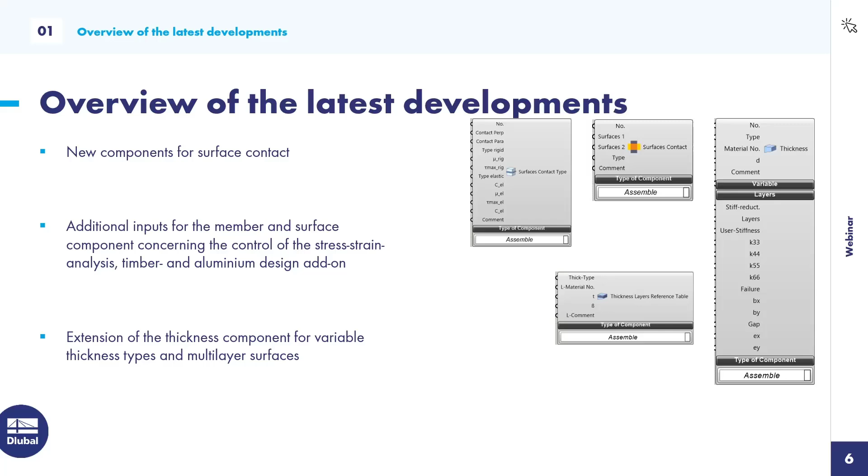I think the key feature is here the template functionality that we implemented a while ago into our export component. And the last feature that I will show here in the PowerPoint presentation is the extension of the thickness component for variable thickness types and multi-layer surfaces. This obviously will be a topic of today's live demonstration. The last feature that I would like to show here is actually related to the installation process of Rhino. So let me show you Rhino 8 in a second here.

In the past, the plugin could be installed via a specific folder in the RFEM 6 program folder. We changed it. Everyone can install the plugin now via the Rhino package manager. So if you go into Rhino and you call up the package manager, you can search for Dlubal here, and you can see the Dlubal plugin, and here you have various versions of the plugin. An important information for you: in case you're using Rhino 7, you should use the versions with the number 7 in the front. And in case of Rhino 8, use the versions with the version number starting with the 8. For today's webinar, I'm using an internal version. Anyway, you can do the exact same algorithm in the current customer version of the plugin.

All right, then let's switch to the second chapter of today's webinar, the live demonstration. To give you a feeling for what I'm doing in Grasshopper, I would like to show you the final structure first in RFEM, and then hop right into Rhino 8. So that's the CLT structure that I would like to model. It should represent a bus or train station, where you can wait for your train or for the bus, and you're protected against rain and wind and so on.

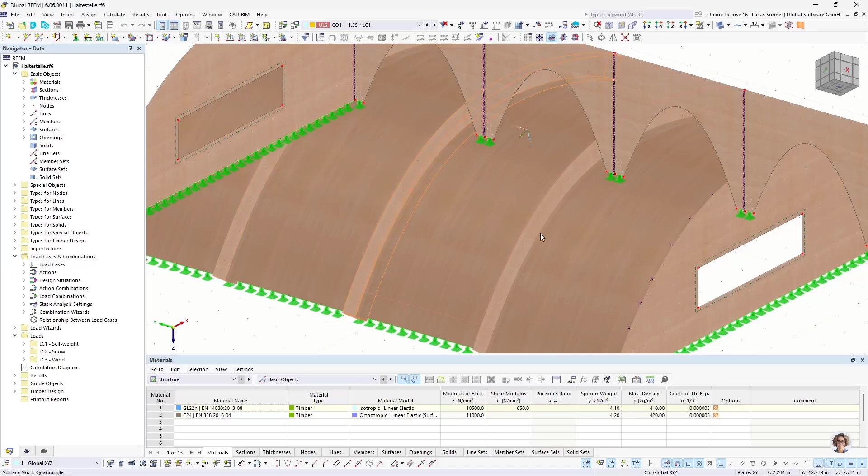So you have here these CLT wall, slab and wall elements, and inside some additional timber beams that support the roof, and on the front some openings to go to the train, and on the side some windows to see if the train or the bus is coming. Obviously a made up example, but it serves the purpose of today's webinar.

I would like to show you the workflow and some new components. What do we have here as well? We have some line supports on the bottom, and additionally some line hinges, because CLT panels are usually connected hinged. So we need the line hinges as a tool here to have the proper force transfer. That's also the most tricky part of this whole algorithm. I will explain it, of course, afterwards.

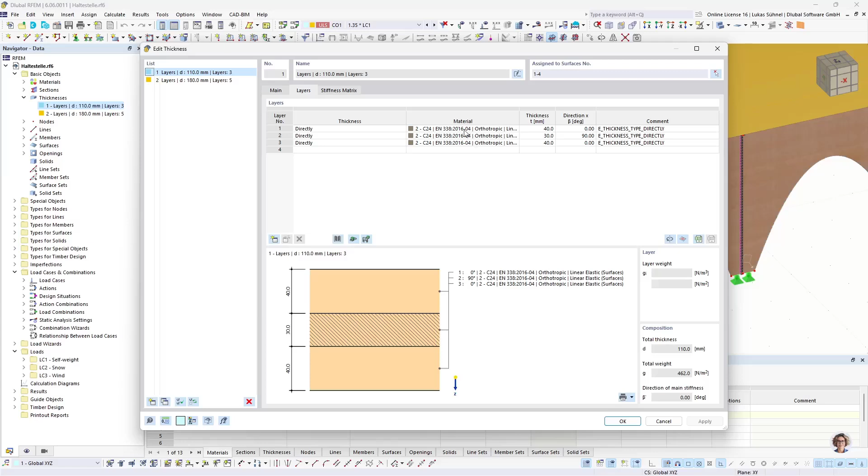And apart from that, we have, of course, our new layer thickness types in here, in which we then define the layers individually. All right. That should be it as a rough introduction of the structure. Let's go right into Rhino 8, and here I will put Rhino to the left and Grasshopper to the right in a second.

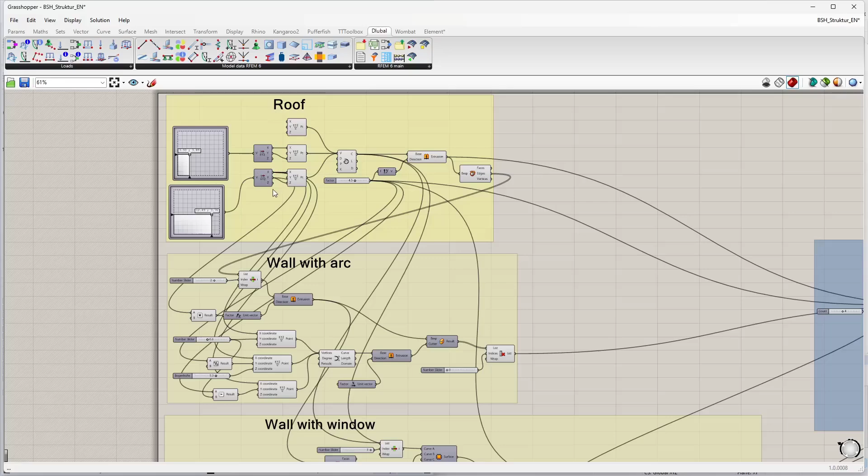One more little overview for you, what I will do in the next hour or so. I will create this algorithm here. We start with the Grasshopper algorithm, where I model the roof of the structure, then the walls with the arc, the wall with the window, then some data management, copying and so on, collecting my objects, the surfaces, the lines that I will use again afterwards, and then the connection to RFEM via our Dlubal plugin.

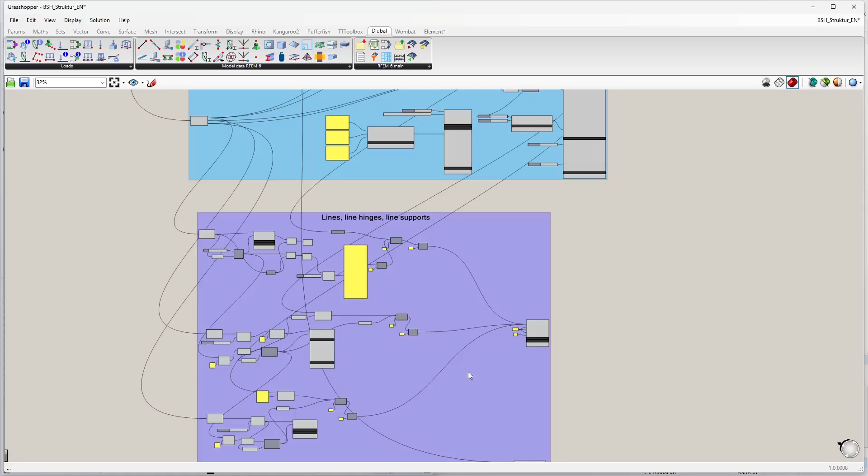I will create materials, sections and members, thicknesses and surfaces, and last but not least, lines, line hinges and line supports. All of those components then will be connected with our export component, and we get the structure in RFEM 6. All right, so let's create a new file in Grasshopper, move it to the right hand side of the screen and start with the modeling.

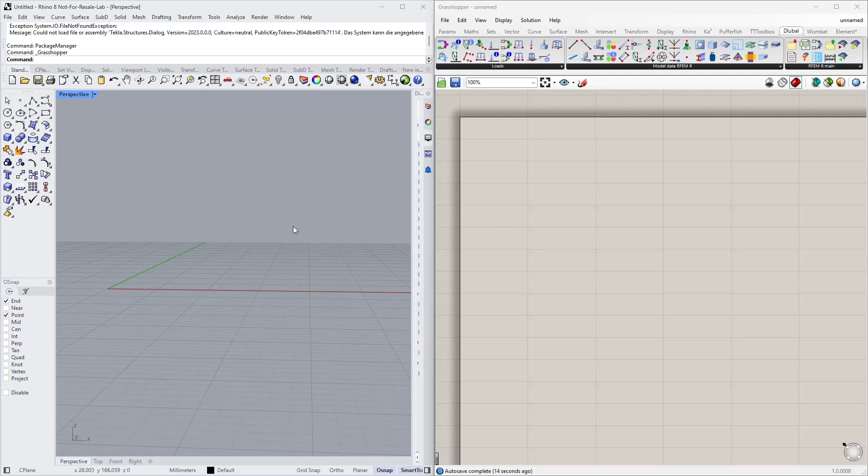As I said, I would like to begin with the Grasshopper algorithm. So I need a plan how to model that, and I will start with the roof. The roof was curved, and therefore I need some kind of a curve with the interpolate component. The interpolate component requires the nodes. You can see it basically on this little icon here. You need to define the nodes and then it will interpolate a curve.

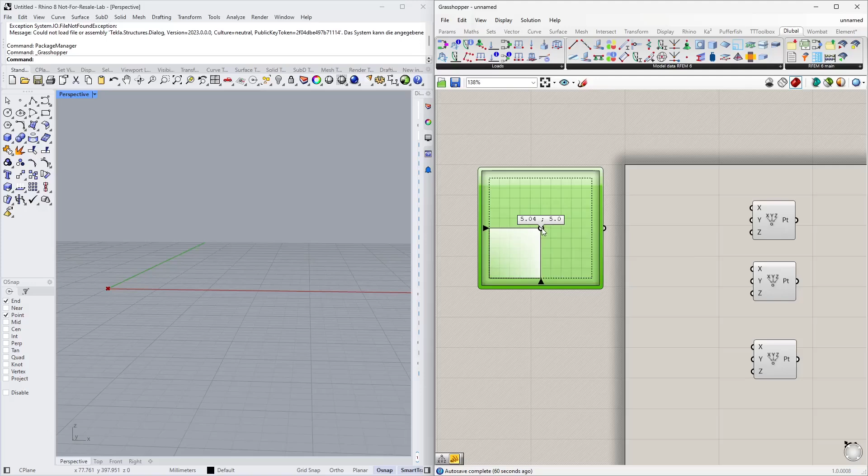And therefore I need 3 nodes and I use the construct point component for that. The coordinates of those nodes should be defined with MD sliders. This MD slider's properties will be changed a bit, so from 0 to 10. So with this slider I can define basically a node, a coordinate x, y, z. Z, however, is always 0 here, so I change x and y coordinates by moving this little dot.

Now my curve will be in the xz plane, therefore I need to deconstruct the node that I get here. So I deconstruct the node and I build it again, just using different coordinates. So x should remain as the x coordinate. The y coordinate, which I can modify here, should be the z coordinate. Actually that's already the second node, my bad. The first node should be at 0, 0, 0. So that's the first node here in the center of origin.

The second node, which I can modify now with the MD slider. And the third node should also be modified via an MD slider. So same logic. Y should be set. And now I can define this arc. Let's pick some proper coordinates. And now I can connect it to my interpolate component and I have a curve. So that could be the shape of my structure, for example.

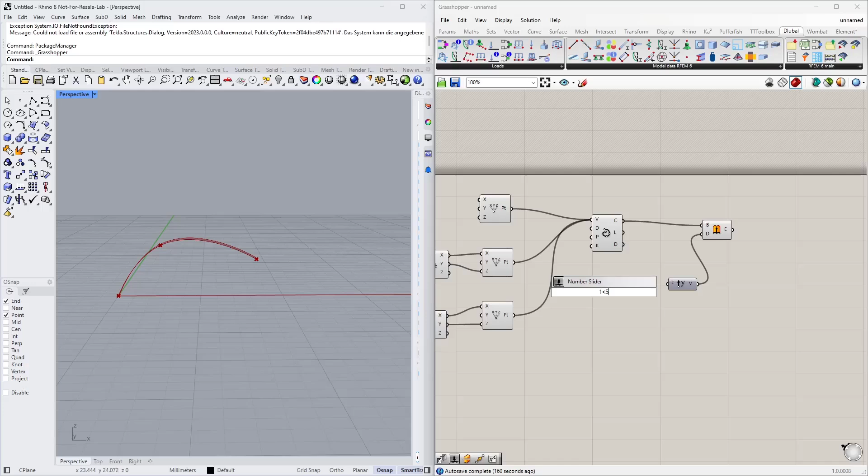All right. Now I need a surface, so I can simply extrude this curve into the y direction. And I want to define a distance via a slider, so I define a slider from 1 to 5, for example, using the metric units here in my head. So now I can extrude this line into a surface. All right, that's basically it.

That's already the first part of my little algorithm, and I group it, and for a better understanding I can give it a little name. So that's my roof surface, for example. Okay. All right, so second part is the wall on the front. Let me show it again in RFEM so you can follow easier.

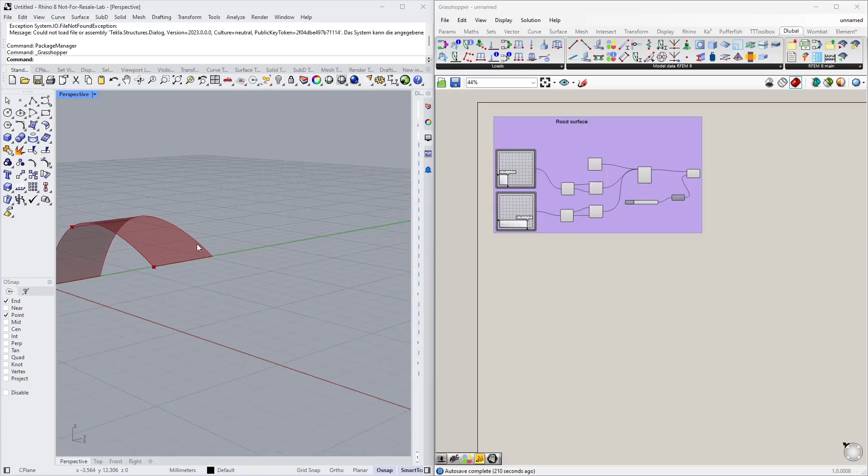I want to create this wall now with the arc-like opening. So what I need for that is this line here, and I want to extrude it into the Z direction. To get access to this line, I will deconstruct that surface. Therefore I have here the deconstruct brep command. I link it to my surface.

Now I have here the faces, the edges, and the definition nodes, and I need just one of these edges, so I take a list item component, connect it here, then define the little slider to select the line from that list. Let's see which it is. Index 0 is the one on the end, on the bottom. Index 1 is this arc. Index 2 is the line that I need.

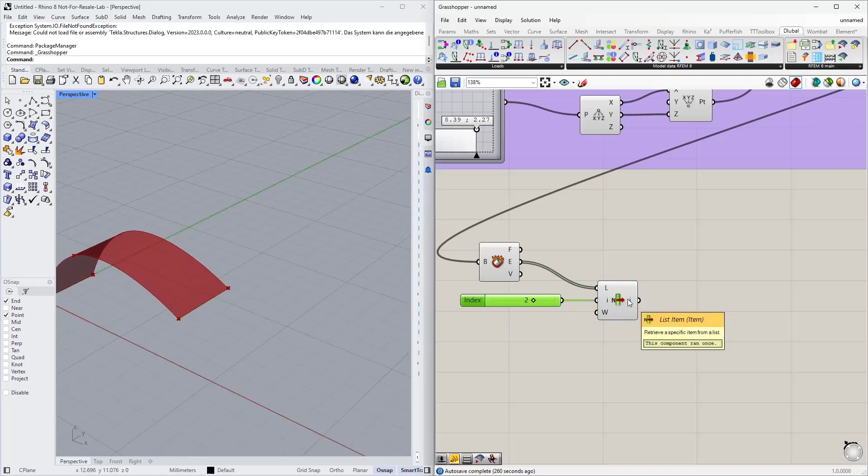Alright, so I have this single line in this component now, and now I simply extrude it again in the Z direction. And we can already see it is the wrong direction. So I probably need to multiply it by -1, and the coordinate itself comes from my arc or my curve that I defined in the beginning. It's the Z component or Z coordinate of that node. So obviously the Y coordinate here, and multiplied by -1.

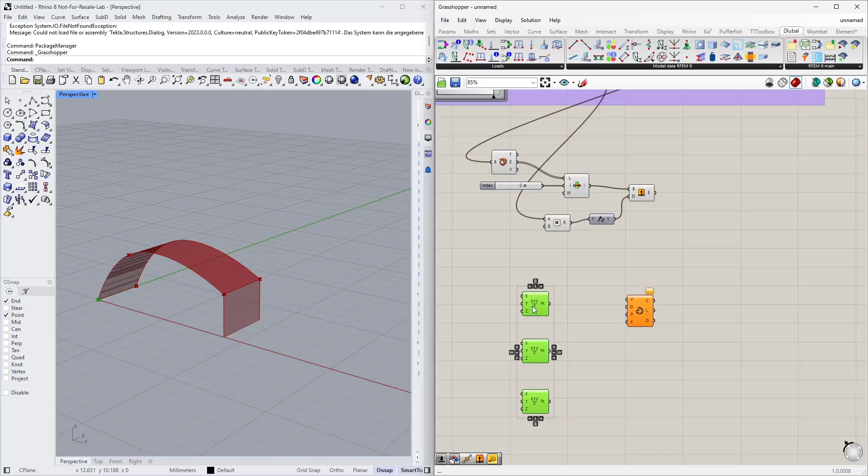All right. So where should the first node be? Basically, all of the nodes have the same X location as the wall or the end point of my curve. So the X coordinate is always the coordinate from the last point of my curve. And now I need to modify the Y and the Z coordinates. The first node should only move slightly in Y direction, so I make a small number slider, and I want to have floating points, so I change the type of it and connect it to the Y coordinate. So this distance that I define here via this node is basically the length of my wall support on the bottom.

The second point should be in the center. Center basically means the dimension of the extrusion divided by 2. So divide by 2. Link it to the length of the extrusion, and that's my Y coordinate for the center point. And I need a number slider to modify the Z coordinate. All right. Maybe also with floating points, so like that.

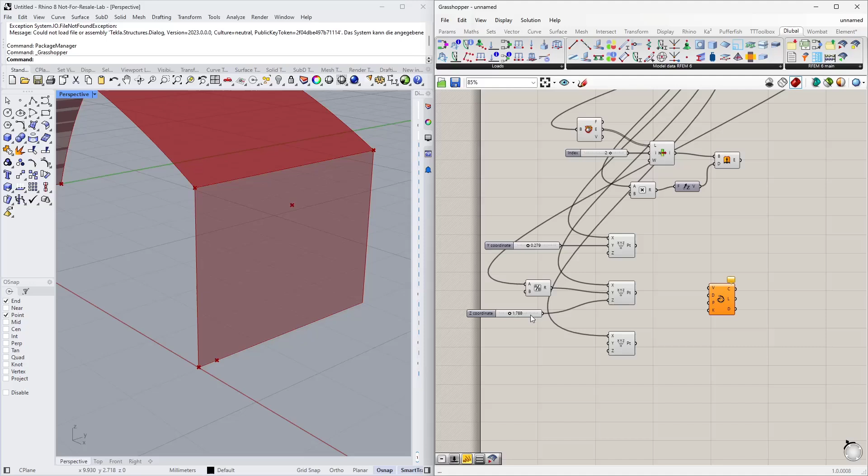And the last point is again on Z on the bottom of the surface, and it should have the same distance as the first point. So again, I just do a little subtraction. I subtract my required support length from the extrusion length. That's the Y coordinate. So whenever I change the length of the support, it will change on both sides. All right, these are my 3 definition nodes for my curve. And now we can see it.

The next step is, let's say, like a trim command. I would like to cut out this part of the arc from the rest of the surface. I can do that with the component split brep. The base surface is this one, and the so-called cutting shape is a surface. So I need to extrude my arc again into X direction to get a surface for it. So actually extrude first, extrude in X direction. Yeah, just any surface, and now I can use it to cut the original shape.

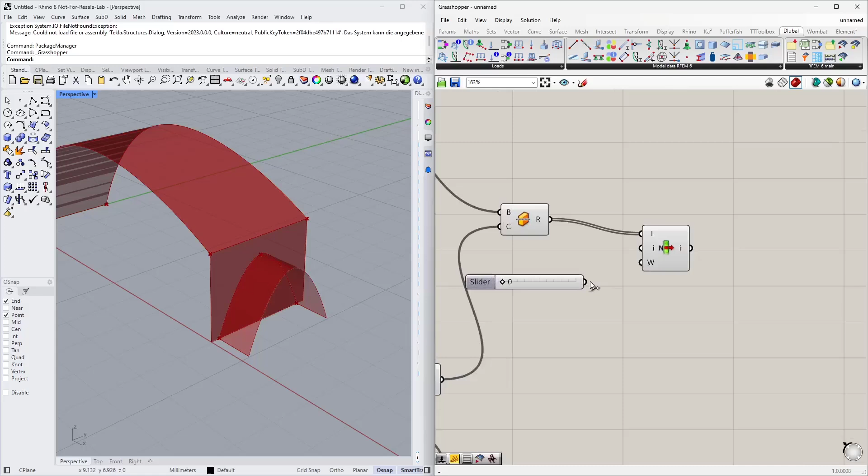I get here 2 surfaces now. I just need one of them. So again, a list command to pick one of those indexes, and a little slider to select the right one. So index 0 is, let's say, the surface of the opening. Index 1 is the remaining surface, and this one I want to keep. So let me hide some of the other objects to see the result of my little algorithm. That's the remaining surface. That's the one I need for later.

So I already finished the second part here. Again, I could give it a name. Arc, surface, whatever. Just so that I can easily understand what I'm doing even a couple of weeks later. And now the last surface is the surface in the front. To create that, I would like to use the edge surface component.

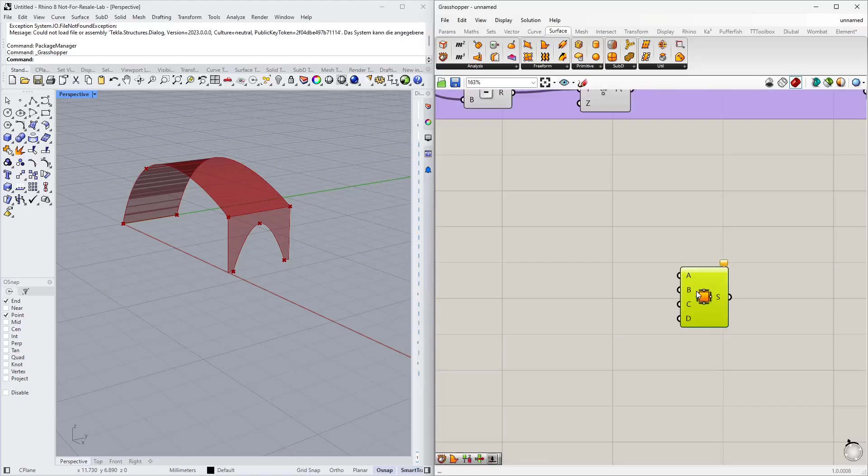I only have to define the boundary lines. One of my boundary lines is of course my curve that I defined in the beginning, like from the roof. And the second curve for my surface should be this side line of my front surface. So again, I deconstruct this surface here in the front. And I try to select this line here on the side, again with the list item component.

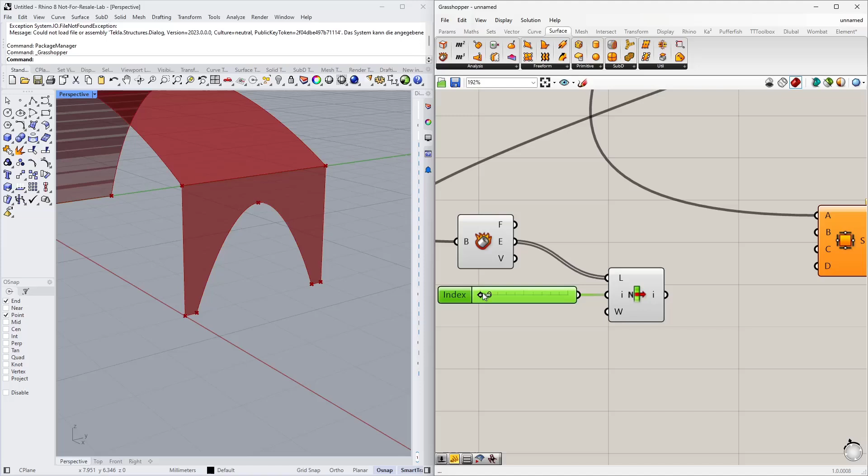Let's connect a slider to it, and now let's go through these lines to see which one it is. Oh, the edge lines, of course, obviously - that's the other side. Now I have it already indexed number 2. Yeah, that's the line I need. So I connect it again to that surface component, and I already get the final shape.

So far so good. Now I need to cut out a rectangular hole in here. Same logic as before: I will create the rectangle in this case by 2 points, A and B. Then I extrude the rectangle and cut it again from the original surface.

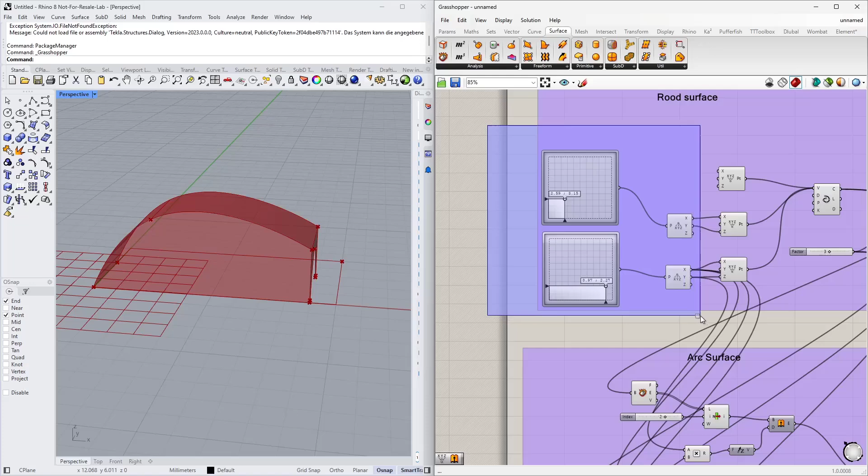These 2 definition nodes of the rectangle can or shall be defined again via a slider. So I just copy some of those things here, copy, paste, and I will reuse it down here. Yeah, actually that's already okay - I can connect them as definition nodes for my rectangle.

The rectangle can be placed in any plane, as you can imagine. So I can define the plane by setting it here graphically, or in the Rhino lock area on top. I would like to have the rectangle in this ZX plane. Okay, yeah, that's now in the right plane.

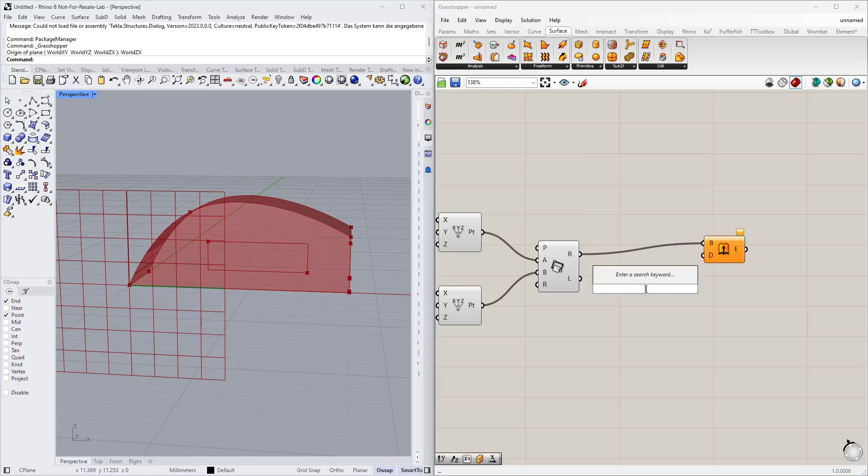Let's set some proper coordinates for the rectangle. So maybe that's the size of the window that I would like to have, and now I have my rectangle here. Again, I extrude it into the Y direction.

Now I can use the split command again, split brep, to cut out a hole. Let me copy the list item that I defined on top here. Again, I want to keep only one of those surfaces, and this time I think it is index 0. Exactly, yeah. So let's hide some stuff to see the result of our work here - that's the remaining surface with the opening, the rectangle opening. All right, that's already the basic geometry that I need.

And now I can copy this stuff - sidewall, let's say. Okay, now let's copy the surfaces. That can be done with the move command or move component. And which objects do I want to copy? Of course, my roof surface and my front surfaces or front surface. And the default is set, as you can see.

Yeah, it's copying it in the vertical direction, which is not correct. I want to copy them in the Y direction. And I want to copy them multiple times. For copying something multiple times, you can combine a move command with the series component.

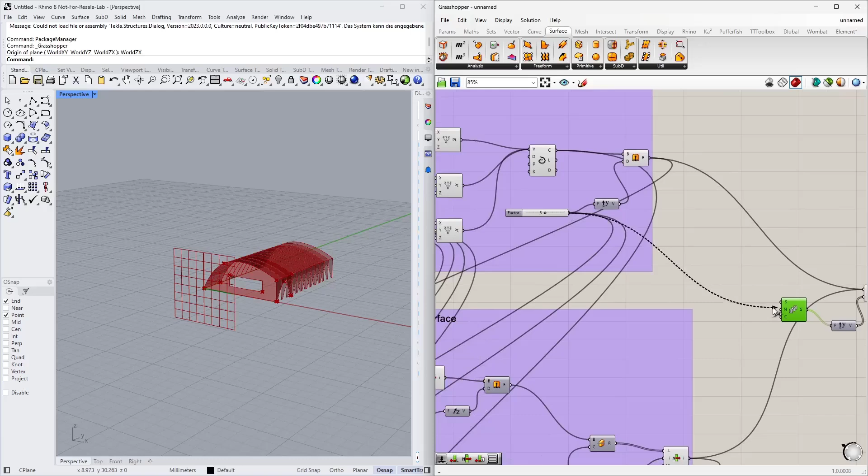And as a step, I would like to use the extrusion length, of course, to have them placed next to each other. Now I can control the amount of copies with a small slider - let's say 4 copies. All right.

That's a big part of the structure. Now I only have to copy the front surface to the end. So I use another move command for that, and I copy this surface. Of course, not multiple times - I only want to have it one time.

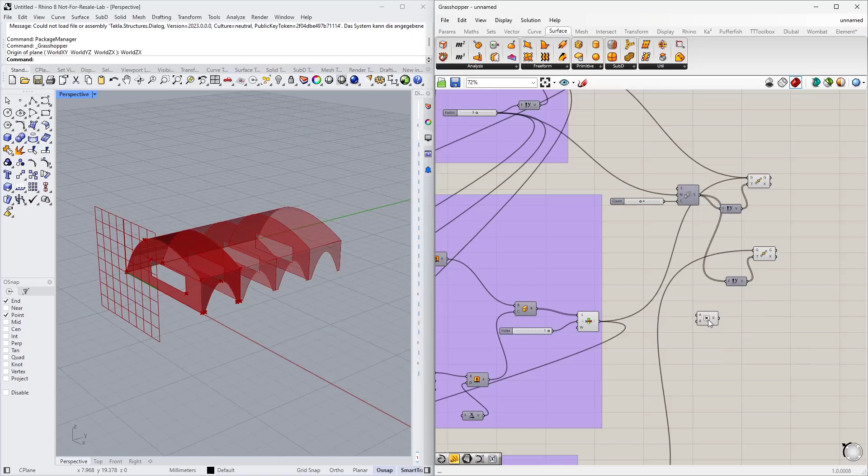And then the distance for this is actually a little multiplication - we simply multiply the extrusion length with the amount of copies. And that's the length that we need to copy it from the front to the end. Okay, so far so good.

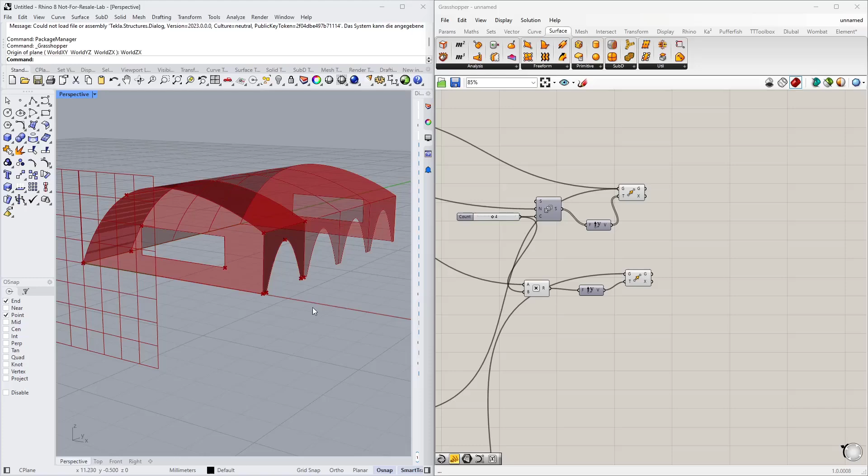The geometry is done. What I need now is a little bit of data management, because afterwards, thinking of the RFEM 6 connection, I need a collection of lines. I need the collection of lines on the bottom, all of those down here, because on those lines I would like to assign a line support, and I can use these lines in my line support component to export it to RFEM 6 afterwards. Additionally, I need these 3 internal curves, because I want to assign a member or a cross section to them, and maybe also a collection of all of the surfaces that I have.

So maybe let's start with the curves for the beams. How do I get those? They are basically inside that component. This component contains all the surfaces from the roof and from the front. Now, if we take a look at the data in that component...

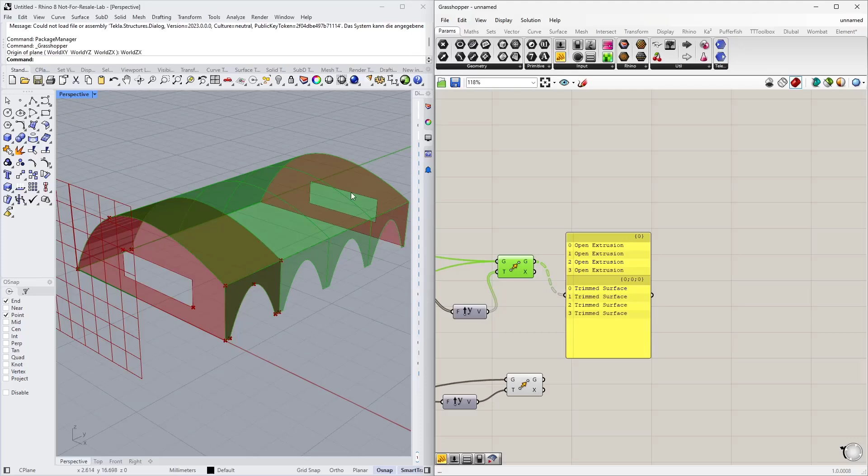We see that it has 2 groups. Let's call it 1, 4 open extrusions - these are my roof surfaces, and in the second group, my wall surfaces. So what I can do here is I can explode this tree and get each branch of my tree, or get access to each of these branches - first branch, second branch. The first branch, as I said, contains the surfaces of the roof, and I can deconstruct them again.

So you can see it here again. Those are the surfaces, and of course the boundary lines and so on. And now I would like to select only these internal curves, basically just one of those lines per surface.

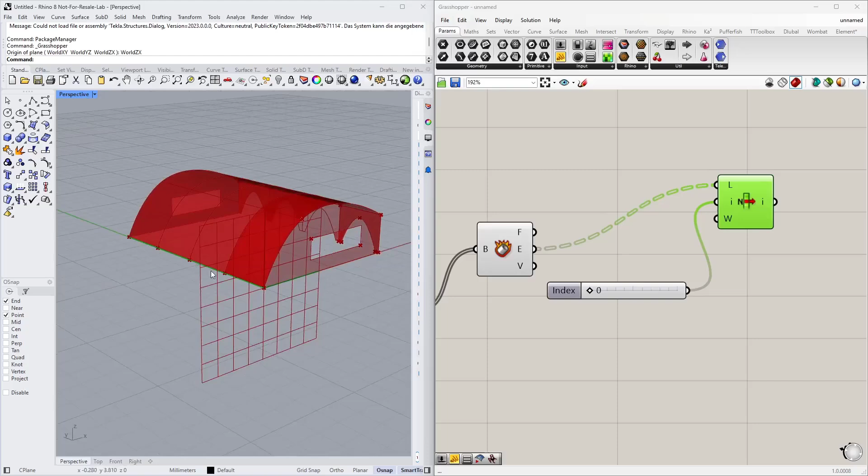So I need again a list item component from my edges, and let's see which of the index numbers it will be. The index 0 is the lines on the bottom. I need that maybe later for my line supports. I'm looking for the roof curves, and index number 1 is the one that I need.

It contains these curves. However, it contains 4 and not just the 3 that I need. So what I can do now is get rid of the last index from that list. Currently it is not a list, it is a tree. On each branch of the tree I have 1 curve, but I can make a list out of it by flattening this tree, and now I remove the last index.

It can be done by using the cull index component, and the last index can be defined by a panel with the -1 value, and the remaining lines are the ones that I need for my beams.

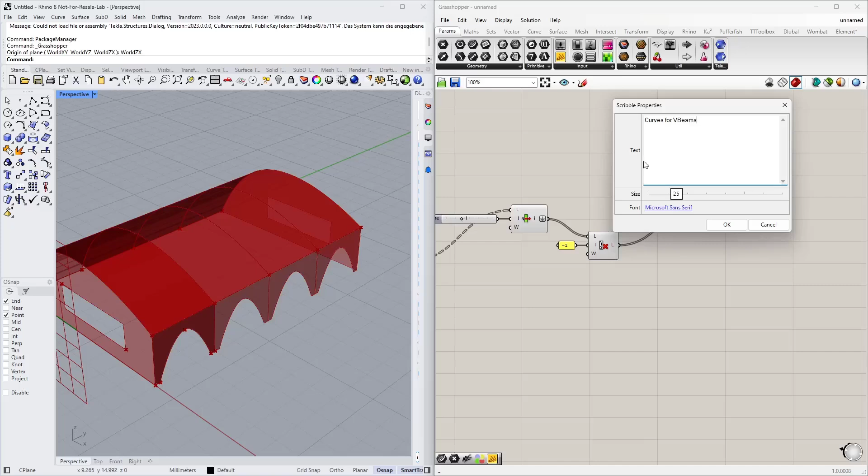So let me collect that in an additional component so I can easily reuse it afterwards. Maybe again a little comment here: curves for beams.

Now, second part should be the curves for my line supports. We already saw it in that component. Here I can select the curves on the bottom of those roof surfaces. It was index 0, so that's already one part for my line supports. And the other bottom lines are included in the wall surfaces.

So basically I can copy this part, connect it to my surfaces here in the front, and now look for the index number of those walls. Which of those lines are the ones on the bottom? So I scroll through that. Index number 1, as we can see.

And now my slider is not long enough, but I can tell you that it's index number 5. So I need index 1 and index 5. So I create a little list, 1, 5, and connect it to that component. This list item gives me now the lines from my, or 2 lines, index 1 and index 5. And we can hopefully see it, that it's the line on the bottom, on the right and on the left side.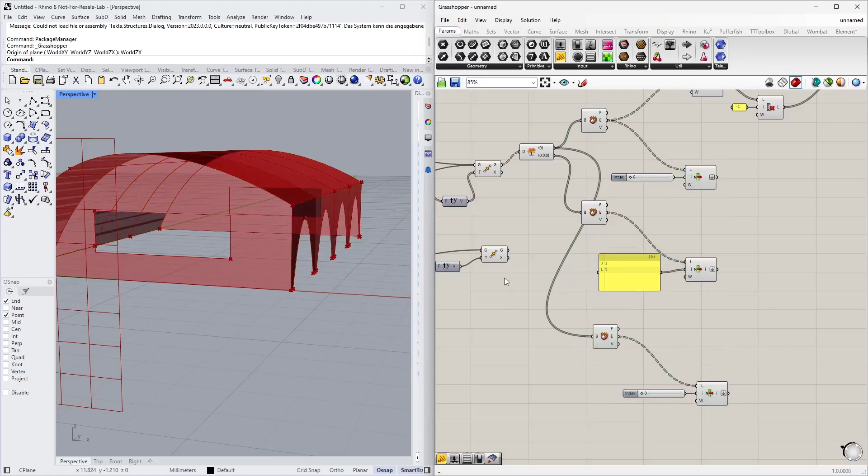Now I need the bottom line from the side surfaces. Same procedure, I copy again this part. I connect it to my, well, actually I need 2 surfaces: the front surface, which is down here, and also the copied surface from the back.

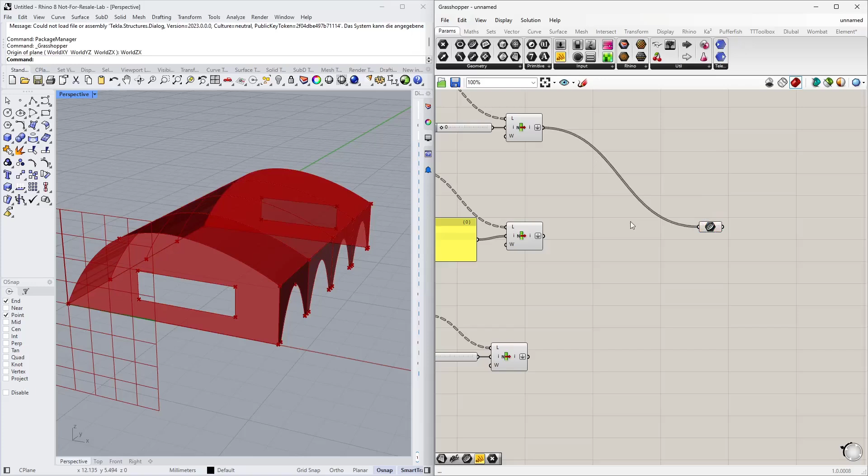And from both surfaces I need 1 line. We can already see it is index 0. So in here I have now 2 lines, and these are now the lines that I need. I can collect all of them in one component again, so just connect them to the curve component, and that component contains now all the bottom lines for my line supports.

So again, give it a little description: line support lines. Okay.

And then I also collect my surfaces in a surface component, most of which are contained in that component where I copied them. And additionally, I have the front wall and the wall on the back, which is in here. So this surface component contains now all surfaces. All right.

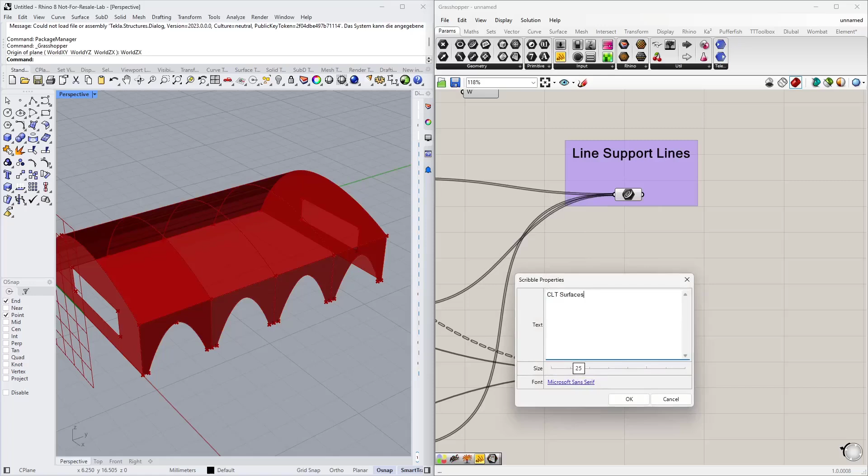So far, so good. Now, next part is the connection to RFEM 6, so therefore I need my Dlubal plugin. Let me increase Grasshopper for a second. The Dlubal plugin will show up after you install it, and it is divided in 3 parts.

We have the model data group, which contains most of the basic objects: nodes, lines, members, surfaces, materials, sections, also components for solids, for thicknesses, supports. I think most of the stuff that you need is implemented in here.

We have another group which is called loads. In here you have components to create load cases, load combinations, but also the loads: nodal loads, line loads, member loads, surface loads, but also imperfections, in case you want to assign them as well.

And the last group contains general components, for example the export component, import component, a component that allows you to run the calculation of RFEM 6 via Grasshopper, or other components. For example, as I said, I use in an internal version the global mesh setting component.

All right, how do we start? I think RFEM gives us a nice hint here. The data navigator in RFEM shows us the basic objects and then specific object types for nodes, and it's kind of the logic that you use when defining your structure. First you define materials, then the sections and the thicknesses, then you continue maybe with members and with surfaces and solids and so on.

The material component can be found here, and a material can be defined by the index number that it should get in RFEM 6 and the name. The name ideally equals the name of this table down here, so you can define your material in RFEM and copy the name. By the way, to get the full name, you can check the program options and see if you have the full section and full material description activated in here.

If you do not have this option activated, you only see GL22H. The code related part of the name will not be shown. But to have a clear assignment of a material, you need also the standard.

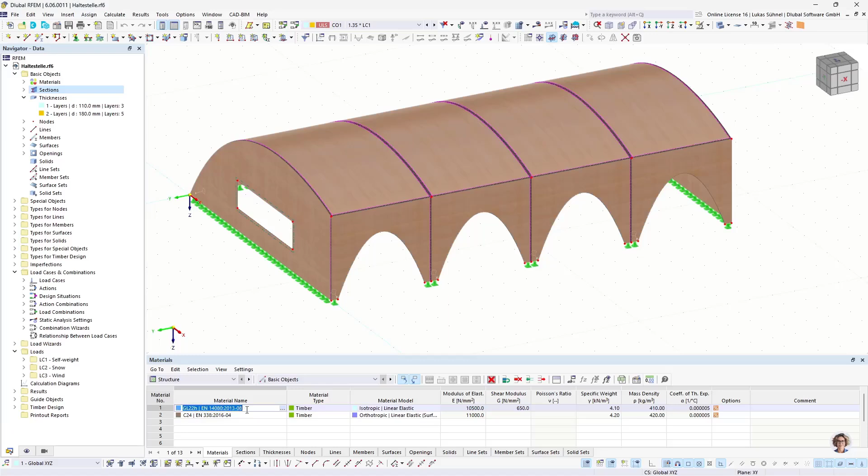So we can copy that name and paste it into Grasshopper. Alternatively, if you had previous projects where you already defined materials and sections, you maybe already created a little library of materials and sections that you use again and again. And that's what I did. I defined here a value list, and I put my own information into that value list.

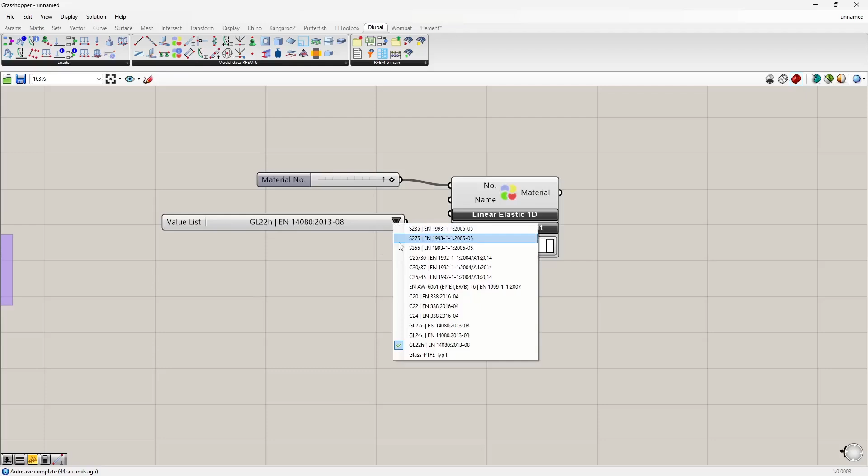You can do it by editing this value list and then just insert the names into it. That's the name that it shows here, and then that's the name which is behind that little description. It's identical for me here, but you can simply copy these things. Then you select the material that you want from that list and assign it to the name input. That's all you need to do.

I copy my material. I need a second one. Make sure you change the index number. And then I select here the material C24. The first material is for my beams. The second one should be for my CLT surfaces.

And for surfaces, we have to use the orthotropic 2D material model, or that's what I want to use at least. So I use a value list to read the options of this material model input and select orthotropic 2D.

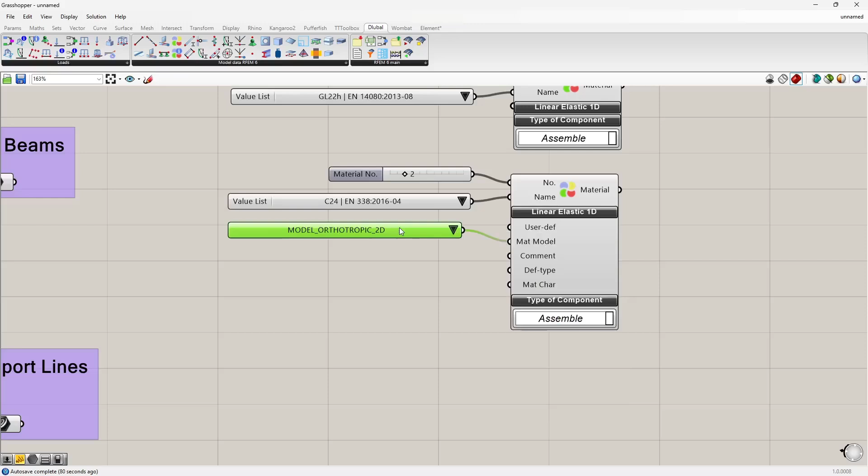Now, next step should be the definition of a section. Therefore, we have the section component, the section for my beams. And again, I assign a name, a number, and I have to assign a material and the name. The material I can link directly from the material component to the section component.

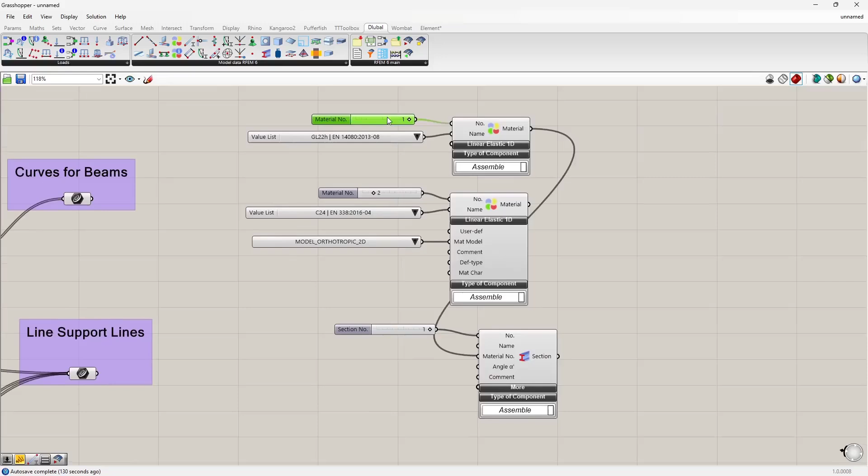This step can only be done if I define the index number first, because what we expect in this section component is the material index number, 1, 2, 3, 4, 5. And to transfer it from that component to this one, I have to assign it here first. If I do not assign it, this connection will not work. That's why, personally, I define usually all these index numbers for all my components, so I can link them together.

Now the last thing is the name. The name is quite easy, it's RM1, rectangular massive section, and then the width and the height. I could copy the string and paste it into Grasshopper, or I build it parametrically. The name is just a bunch of strings combined, basically, text brackets, and the name consists of the part

RM1, then a value for the width of my section. I use here a slider from 0 to 1, I'll explain it in a second. Then the next part of the name is the slash, and then another slider for the height of the section.

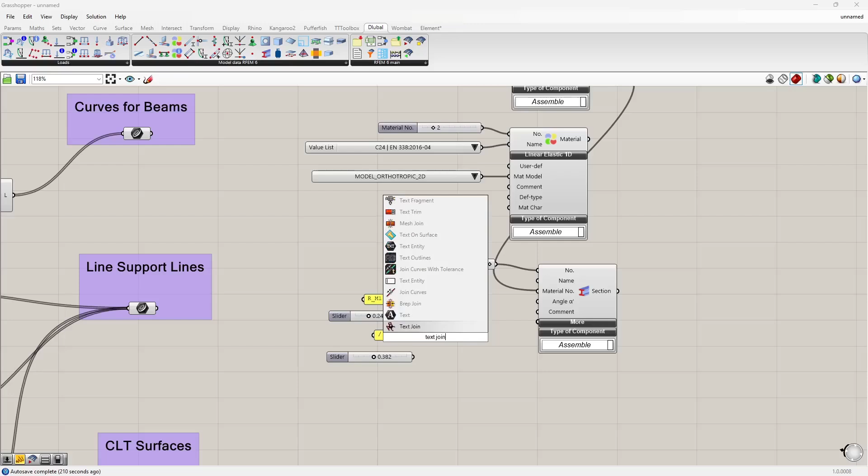All these parts of the name can be joined by a text join component. You just plug it into this input here, and you get the name, or you get one string out of it. Let me show it. Here we are missing the space. Okay, so that's now the name according to RFEM.

There is just one little difference. You can see here I'm using, let's say meters in my mind, 0.24 meters and not millimeters as it is shown in RFEM. This has the following reason: the Grasshopper link is based on our web service, our API, and this API expects SI units. So I have to define the dimensions of my sections in meters, so that I get the right size in RFEM.

Therefore, a scale between 0 to 1. Now I can link it to my name input and the section is done.

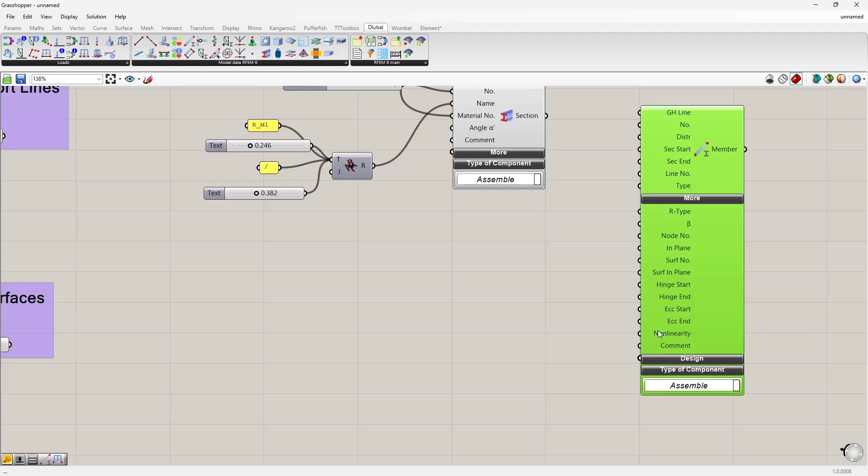Last step for this first group here is the member component. Let me show that too. A member component with some basic definition inputs. Under 'more' you can find options for hinges, eccentricities, nonlinearities or rotations for the member, and under 'design' related inputs. Let's start at the beginning.

I need the Grasshopper lines for my members, these 3 lines. Let me rotate the structure. These are the 3 beams, and I already collected them in here. These are the curves, and I connect them to my member component.

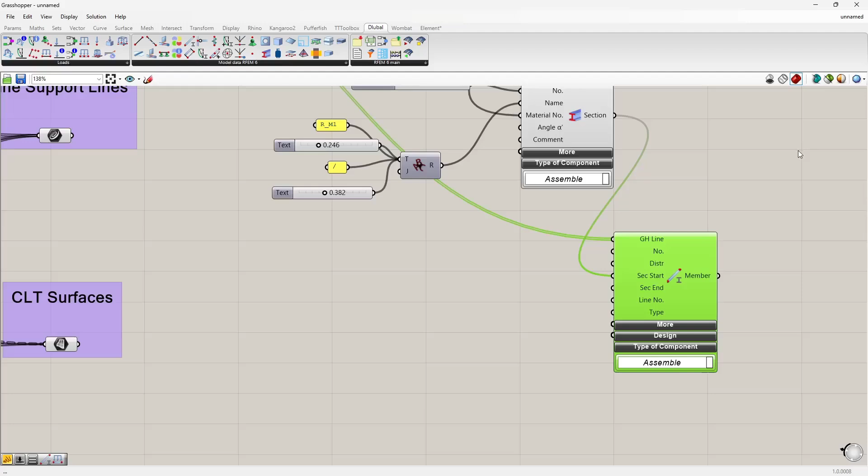The section should be this rectangular section, and that's basically it. There's just one thing I'd want to define in the member, related to the design. I have timber beams, and I'd like to feed in timber design related settings, so that when I export it to RFEM, most of the information is already defined for the design.

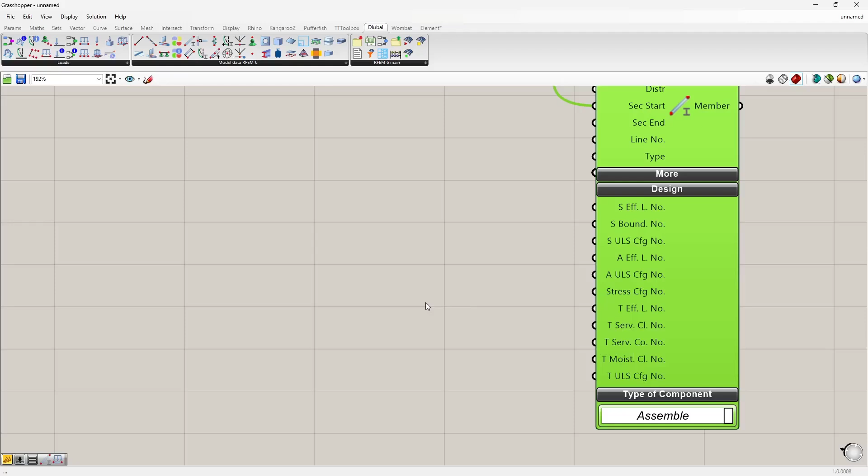So I have some inputs here, as usually for steel, aluminum, then T for timber. For timber I can define the index number of the effective length type, the index number of the ultimate limit state configuration, and the index number of the service class. I can't define these classes in Grasshopper, but I can define the index number of the existing type. Now you may ask, which existing type?

We never defined them. That's where the templates come into play, and I will explain it at the end of this webinar, how it is working. So let me define these types. I used index number 1, and again, more details I will show at the end when I explain templates. So that's already my first part.

Let's group it: materials, sections, and members. Now the second part for my connection to RFEM are surfaces and thicknesses. Let's have a quick look again at RFEM.

A surface consists of some, usually the main input for a surface is the thickness type, what material and which thickness is defined, and it will be assigned to the surface. So let's have a look into the thickness type itself. Here we have different types: uniform, for concrete slabs, uniform thickness type, variable, and also layers. In case of layers, we have a table where we define each layer, the material, the thickness, and the direction of this layer.

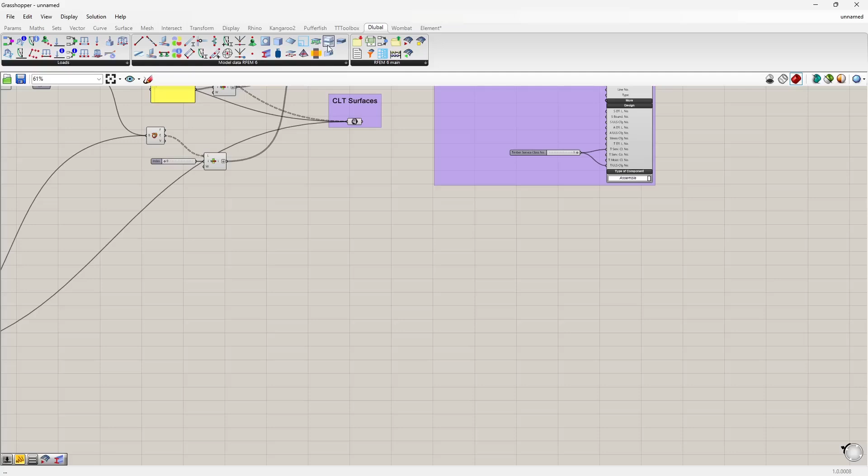Okay, that's what I have to define here, or in Grasshopper. So let's start with the thickness component, which we have here. The thickness component, again, needs a number or an index number. Then the type, I can use the value list for that. In 99% of the cases, the tooltip will tell you what kind of input is required. You can see it here, value list. So I connect it.

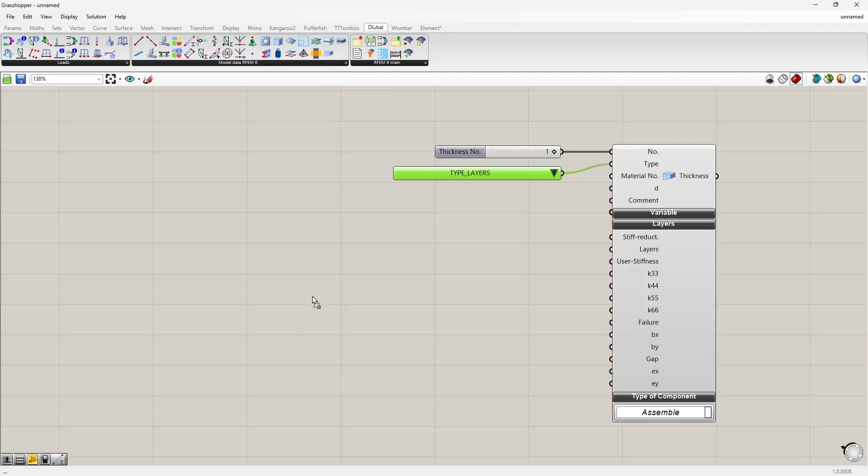And I can select here layers. In case of layers, I can open the layers tab in this component, and here I have the layers input. The layers will be defined in an additional component. Yeah, we had to split it up. So in that additional component, I define the material, the thickness, and the direction, this little table that I displayed in RFEM 6, and this information will then be transferred to the thickness component.

All right, the material should be material number 2, C24, orthotropic material model. The thickness can be defined in a little table. Let's say 0.4, 0.3, again meters, 0.4. And that should be a list.

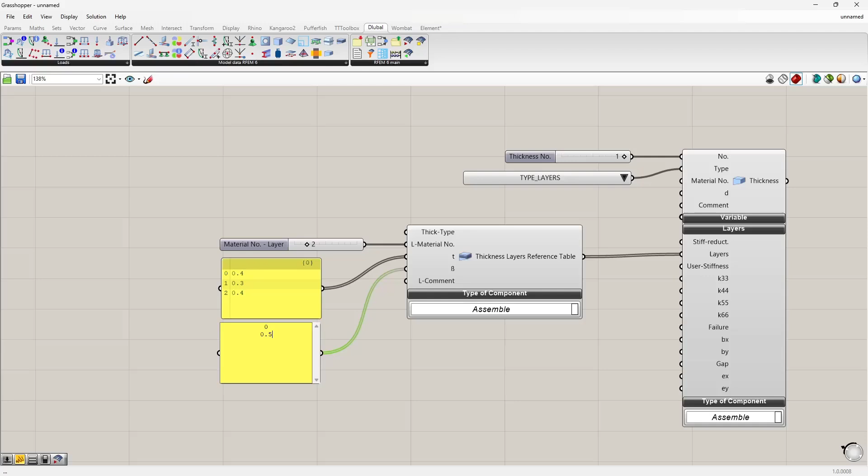And the same logic for my rotations. The direction of each layer should be 0, 0.5 multiplied by pi, 90 degrees, and 0 again. Yeah, this is this little subtable which I showed in RFEM, and it is connected to the thickness component. We have a lot of additional inputs in here.

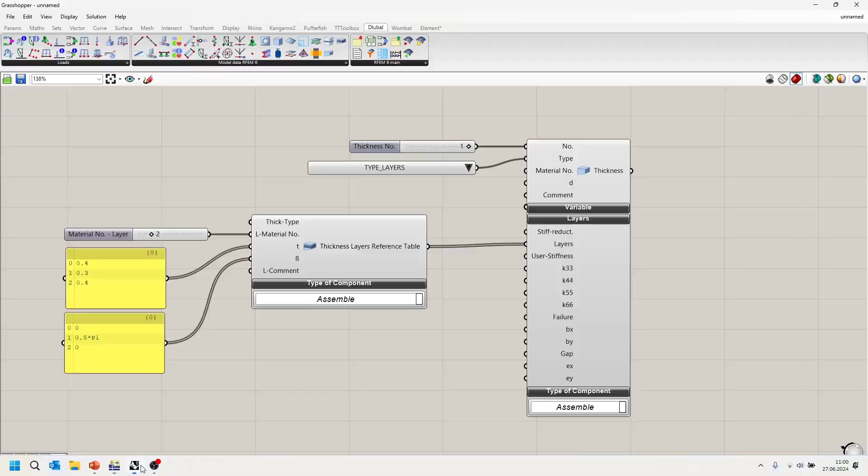I can show them as well in RFEM. I do not use them today, but in case you want to apply a stiffness reduction to these CLT thicknesses, then you can activate them with this button, and then you have access to these modification factors and additional options, and all of them are included in our component, as you can see here. So that's the thickness that I want to create.

Now I need to connect it to a surface component, and the surface component expects additionally the Grasshopper surface. Now I want to use that thickness type for the roof surfaces. That surface component here, let me show it again like this, contains all surfaces, again in a tree-like structure.

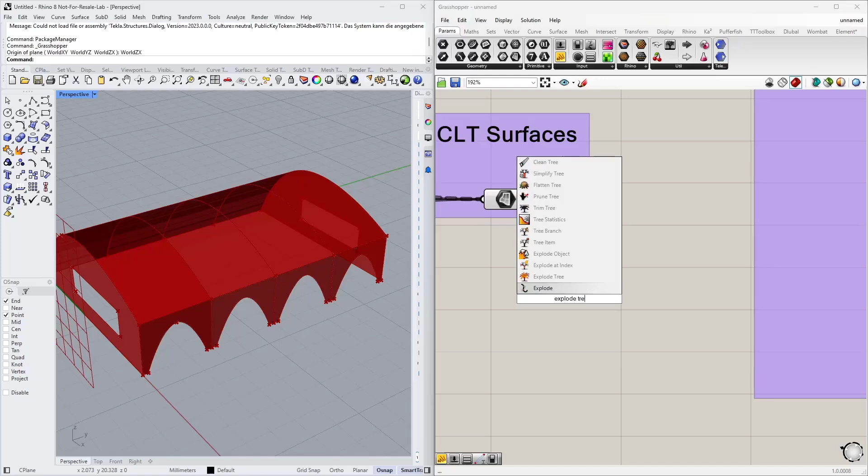Yeah, I showed it before, 3 groups. My roof surfaces are in group 1, so what I will do here is I explode the tree that I have here, and use, I need it later as well, use the surfaces from the first branch for my surface component.

The last step here is the numbering. As I said, I tend to number all my surfaces, so that can be done with the series component. This number, the index number, starts with the value 1. So I define here the start index number as 1. The step is of course 1. 1, 2, 3, 4, and the amount of index numbers that I need is linked to the length of this list. I have here 4 surfaces inside, depending how many copies I create in my Grasshopper algorithm. So the length of that list is basically the amount of copies that I need.

So I can count the length with the list length component and connect it here to the amount of copies. And now I get a list of 4 index numbers: 1, 2, 3, 4. That's what I need for my surface. All right.

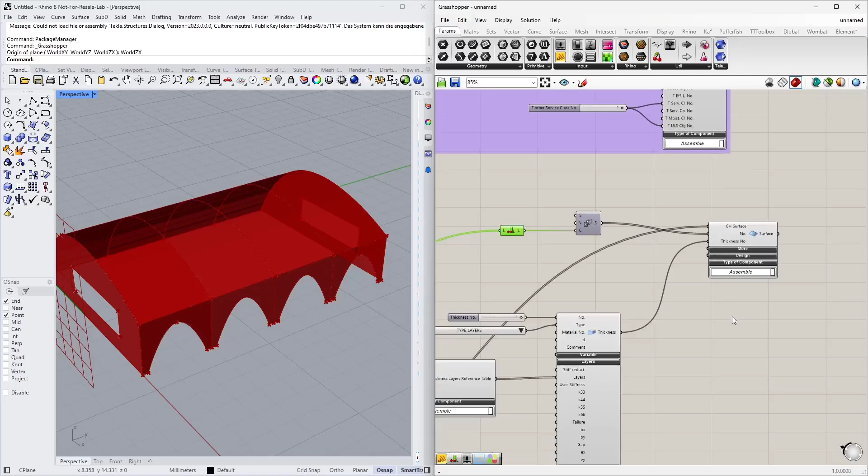That's the surface component. And now I need another surface component for my walls. So I simply copy all this stuff. Copy paste. This time I want to use the remaining surfaces. So these are my front surfaces and these are my surfaces from the side, and I connect it as Grasshopper input.

Concerning the thickness for the walls, here I would like to use 5 layers, so I simply copy them. Okay, same for the directions. Okay, and I need to change the index number, obviously, of my thickness. Yeah, that's second thickness, so index number 2.

Again, the remaining part is the numbering of those surfaces. I will use a series component again, but I'm not going to start from index number 1 as I did it before. I need basically the last index number from this numbering plus 1. So that's not difficult. The last index, I can read it via a list item component, and I select here the last index, using -1. So I get the value 4 out of this component, and then I add 1 to it, so +1.

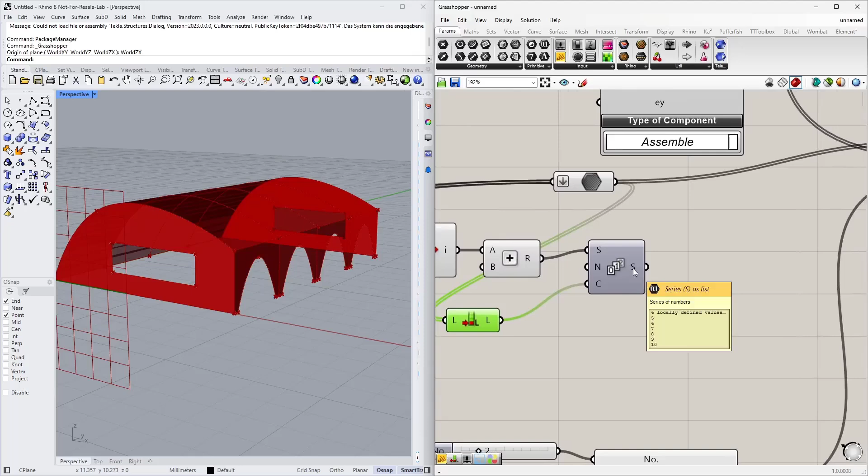Here it is. The length of that list is again the amount of copies that I need. So I have here the numbering 5 to 10. So that's exactly what I need. 6 values for the numbering, 6 surfaces.

That's good. All right. One more thing that I would like to define in here is a mesh refinement. Why? Simply because the default global FE mesh length is 0.5 meter. We have here a distance of, what did we define, about 0.3 meters. So let's have at least 3 elements over this length here. So I would like to use an FE mesh length of 0.1 meters for those wall surfaces.

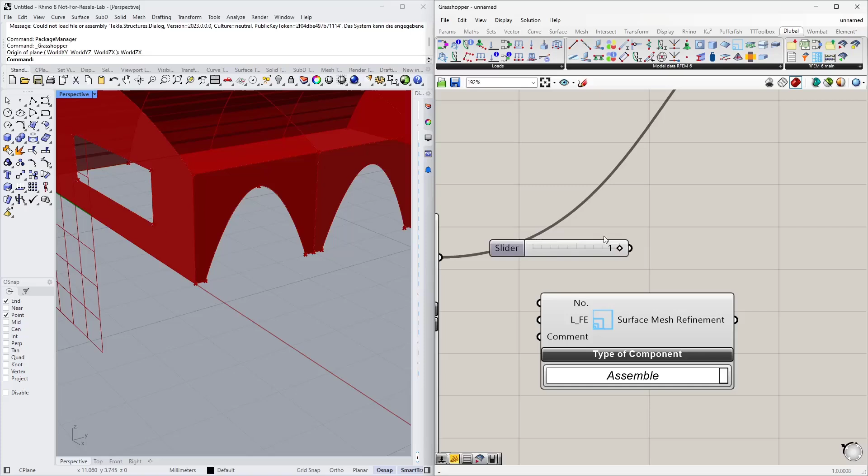Therefore, we have these mesh refinement components. Here's the surface mesh refinement component. I assign the index number and the required length, 0.1. All right, and I simply connect it to the mesh input.

Now, what I forgot also on the surface on top is those are timber surfaces, obviously. And again, I would like to define some things for the design afterwards: the service class and also the ultimate limit state configuration. Therefore, I assign here types number 1 for the ULS configuration, and the same here. Let's extend the design tab. ULS configuration, service class. All right. Again, explanation will follow afterwards.

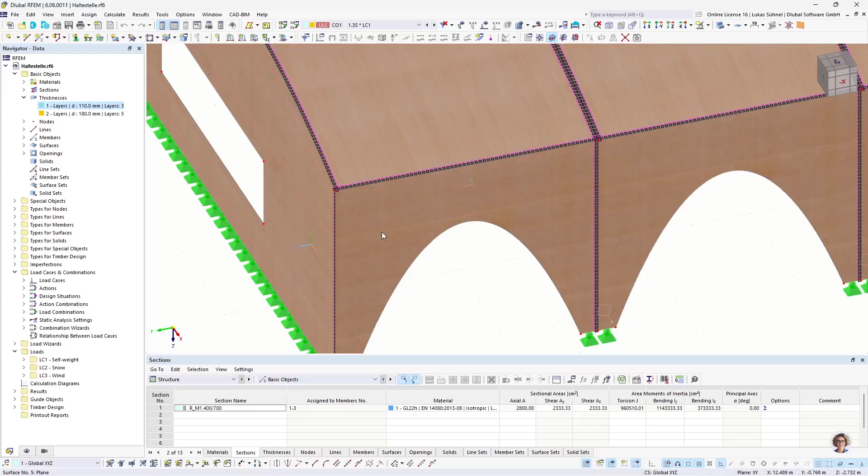Now, this is the second big group for the connection to RFEM 6. And now the last part, which is related to the line hinges. This is the most tricky part, I would say, in that example. Let's have a look inside RFEM, how they are defined. Line hinges, as I said, control the force flow between surfaces, and we find them under types for lines, line hinges. And let's have a look. I have just one type here for all of the surfaces.

What we can control here is the hinge conditions, which force should be transferred and which not. In my case, I simplified it a bit. I say it's just free about the rotation of the local x-axis. So basically along the line hinge, the rotation about this axis should be free, and the rest should be fixed. And that's easy to define in Grasshopper, that's not the issue. The difficult part is this string on the top here. How is it set up?

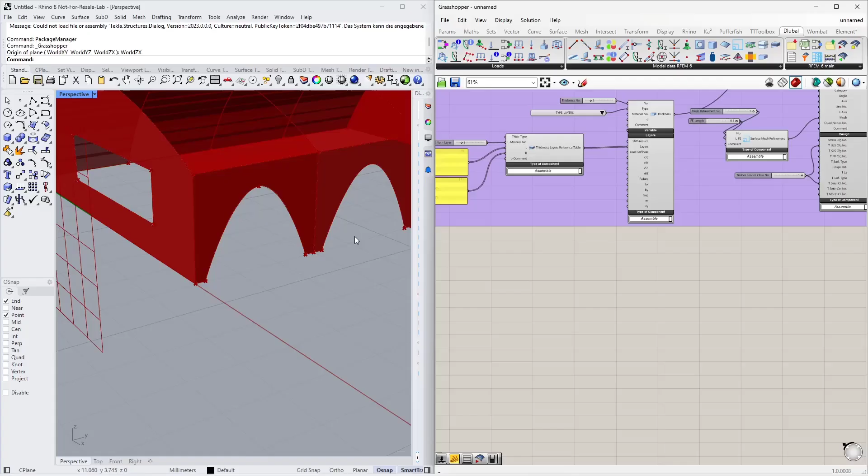It is set up in a way that we have here the index number of the surface where we want to have a line hinge, and then the related lines. So for surface number 1, lines 2, 3, and 4. For surface number 2, lines 6, 7, and 8, and so on. And this is split by a semicolon and a space, and then the next group of surface and lines comes. So somehow I have to build this string in Grasshopper, and therefore I need the index numbers of my surfaces and of my lines where I would like to have a line hinge. So let's have a look again at Rhino and Grasshopper.

I do have a numbering for my surfaces. Yeah, I did that here. But the lines where I would like to have a line hinge are not numbered. So let's start here. I assign an index number to my lines. Therefore, I use this line component here. And the line component requires the Grasshopper line and, let's say, the index number that I want to assign to it.

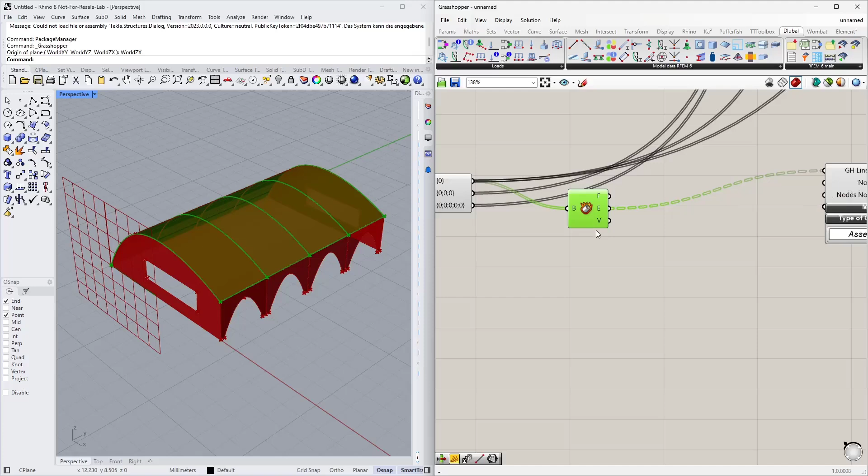The lines for the roof are included in the roof surfaces. I did it multiple times already. I can deconstruct those surfaces. I get my edges out of them, or I get here the edges of those lines, and I can simply say these edges should be numbered, and the number should be starting with the index 1 until the amount of lines that I have here. So I need a series component.

The series component, or the number, should start with index number 1 again, and the amount of copies depends again on the length of this list. Yeah, let me show it quickly. I have here 16 lines, but grouped again. So what I will do is I will make a list out of that group. List length. So I want to use this list.

However, I flatten this tree to get a list, and the last index, 16, I will use for the count. So I get now the values 1 to 16, and these are my index numbers. Sorry, wrong input. Here, number. I also flatten this input here for the Grasshopper line because I need to combine list and list. Otherwise, I will get more lines afterwards. So I have to combine a list with a list. So far, so good. All my lines from my roof surfaces have an index number now.

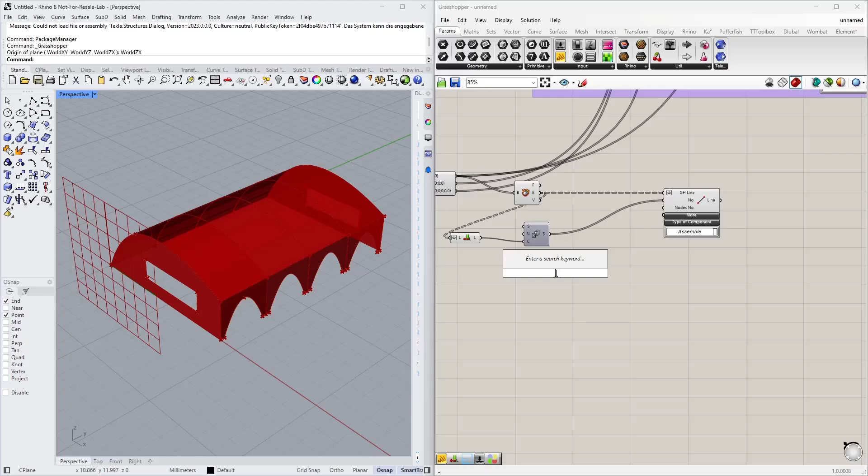And now I somehow need to combine my surface index numbers with my line index numbers. How can I do it? I can do it maybe by collecting the numbers of my surfaces again down here. So this series component, if you remember, contains the 4 index numbers for my roof surfaces. So let me simply bring them down here. So again, I have the same list now here. And let's have a look how the values are shown. I have here the list with the 4 values. And I have here my 16 index numbers for my lines.

If I want to group them in a way that I have always surface 1 with related lines, surface 2 with related lines, a tree-like data structure would come in quite handy. So what I can do is I can graft my numbering to a tree. So each index number will be transferred onto its own branch. You can see it here now. Each of these branches from my tree has 1 value. So I have some kind of grouping now. And the same grouping I need for these numbers.

I would like to have the lines that are related to one surface in one group. I have it already somehow. I have it here. Yeah, each surface has these 4 lines, or they are grouped, let's say. And this grouping I would like to assign to my numbering here. How can I do it? I can deconstruct the path. Oh, wrong. Deconstruct path. I can deconstruct the path that I just showed here, where the lines are grouped.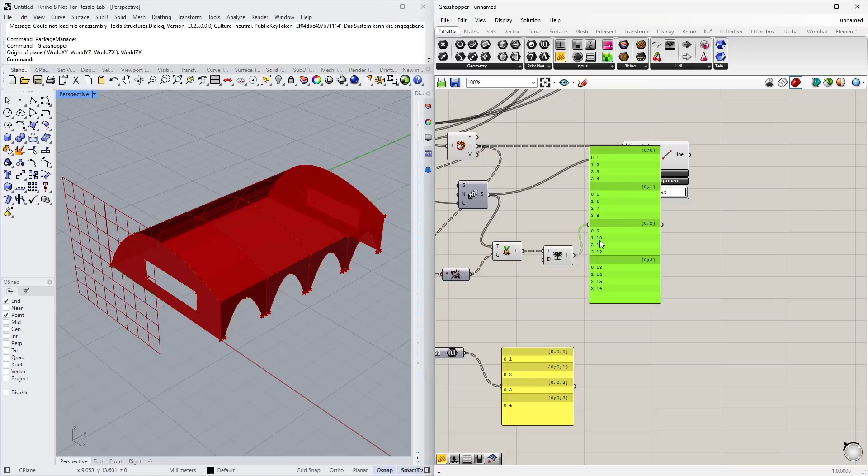from the numbering. Before I do that, I have to get rid of one of those index numbers, because I do not need a line hinge on the bottom lines. I have a line support down here. There's no reason for a line hinge. So I get rid of the index number 0, which is always the bottom line for each group. Easy task, cull index. So we remove one index from the list, the index with the number 0. So now only 3 lines will remain here.

And how can I build the string that I need for my line hinge now? I can use the text join component a couple of times actually to get the desired result. The first thing that I will do is I need these index numbers, the line numbers, split with a comma in a string, not in a list as I have it here. So I join them, and each value should be divided by a comma.

So let's see the result of that. 2, 3, 4, 6, 7, 8. Okay. Now I can join my surface numbering with the line numbering. So another text join component, where I insert the surface numbering first, and then second the line numbering. I just have to be careful that I use the same grouping. So I simplify my groups, and now I have here exactly what I need, just not the right division value. I need not a space, a slash.

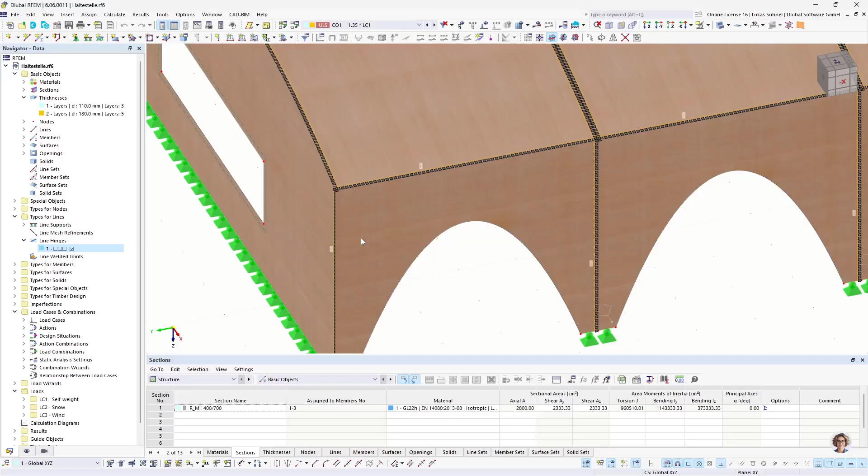So index number 1, surface 1, and then the 3 lines, and surface 2 and the 3 lines. Similar to what we have in RFEM. Let me show it again. Surface 1, line 2 to 4. Doesn't matter if we have here 2 to 4 or 2, 3, 4. RFEM will accept our description method.

And now I need it in one long string, or that's my requirement at least. So I will flatten this result and join it by a semicolon and a space. Okay, and now the result looks like this. And this is exactly how it looks in RFEM.

So far so good. Now let me use a line hinge component, assign a number to it, assign this string to it that I just created and define the connection. So I would like to fix all forces in each direction and release the rotation. You get the information as a tooltip in here. Free rotation is defined by the value 0. Rigid can be defined by inf for infinite, and any other value will be in Newton per meter, in case of a spring.

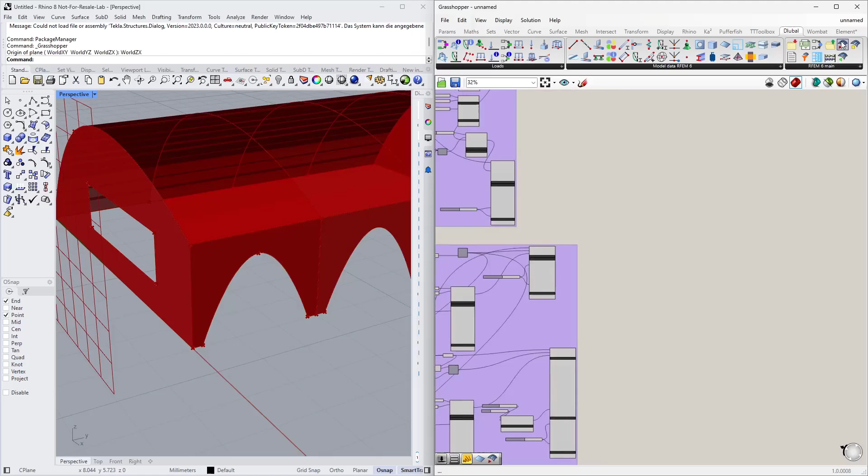If you did all that, the next step would be to connect it to an export component. We have it here. Which inputs are required for that? I tend to use a Boolean toggle to run the export. I set it to true if I want to start the export. And if you leave it on true, it's like a live link. Whenever you change something in Grasshopper, it will trigger another export, or you just set it back to false to stop it.

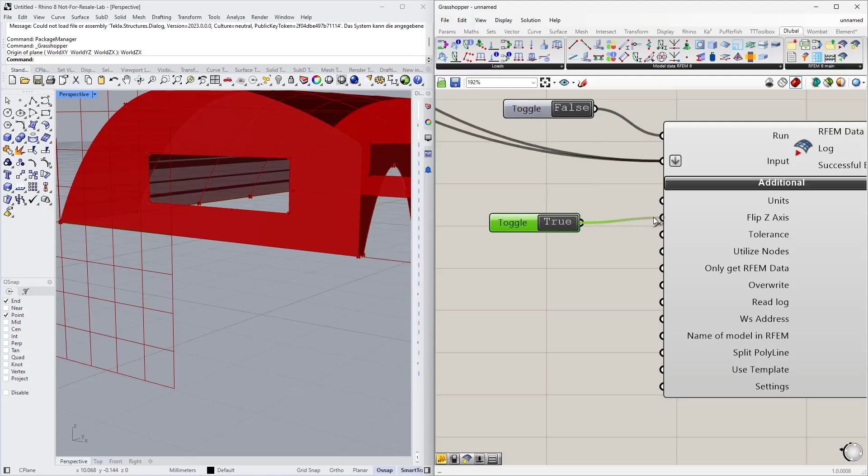The input is basically the connection between all our Dlubal components. So each of these Dlubal components has to be connected to the input. I will skip it here because I will switch in a second to my final example, but you can imagine what you have to do here. And then we have some additional options. Flip the z-axis, which I usually use via Boolean toggle, because the global z-axis in Rhino points upwards, in RFEM, at least in my case, downwards. So I flip the z coordinates here.

What else do we have? We can define the name of the file in RFEM after the export. I don't know, example. So if I export it in that way, the RFEM file will be named example afterwards.

And the last feature that I would like to show here is the use template function. I mentioned it a couple of times when I defined my members or surfaces, and it's quite a strong tool, I would say. As you probably noticed, not all of the objects that we have in RFEM can be defined in our plugin. We are working on that. You saw it in the beginning. We extended a couple of components, we defined new ones, but not everything is included already. If something is missing, then you can't use it, obviously.

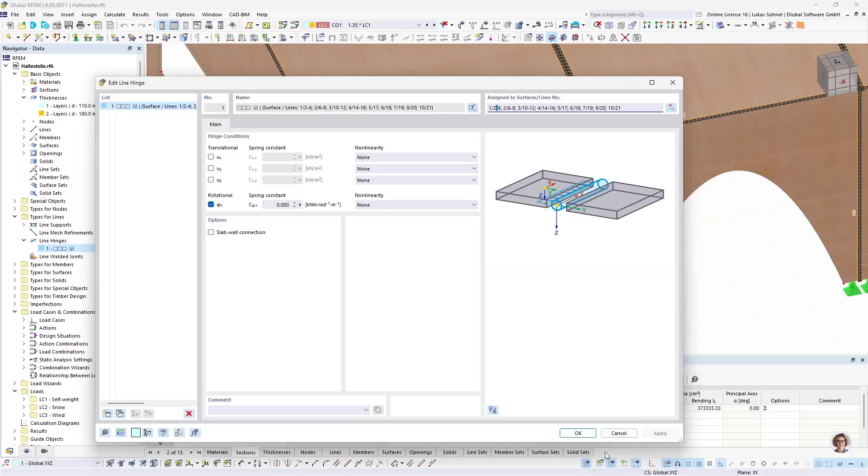But we thought, maybe it would help if you can use a template from RFEM. What's that? Let me go into RFEM quickly. A template is basically a file which already contains specific things. So what you could do, for example, is create a new RFEM file and define some things in there. Maybe some materials, or some sections, or you define already the load cases in that file, the load combinations, or add-on related stuff.

You define here the service class types that you would like to have, or the ultimate configurations for the timber design. You can define all of that in advance inside RFEM. And not only that, also the add-ons that you want to use in that template: multi-layer surface add-on, timber design add-on. All these settings can be saved inside a template.

Save as a template. It's a file that you can put anywhere you want, and then you can link that template to our export. Or you use it in RFEM itself. So when you create a new model in RFEM and it should not be empty, you can say, please read the data from my selected template into that new file. And you don't start from scratch. You already have your load cases, combinations, materials, whatever you defined already.

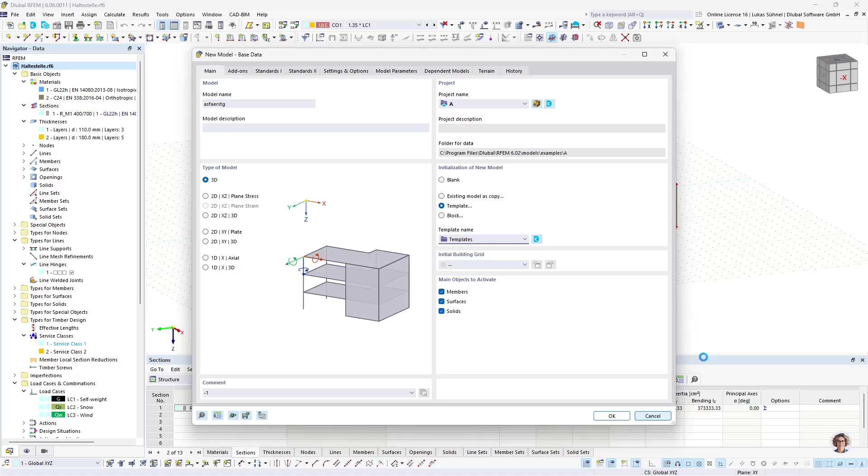And that's the same logic that I use in Grasshopper. Before I run the export of the data that I defined here, I can read the information from a template. And I can link this template via the path. So I go into my Windows Explorer. Now I have to remember where I put it. I think it's under programs, Dlubal, RFEM 6.02, models here. Example, company templates, and here's my template CLT1.

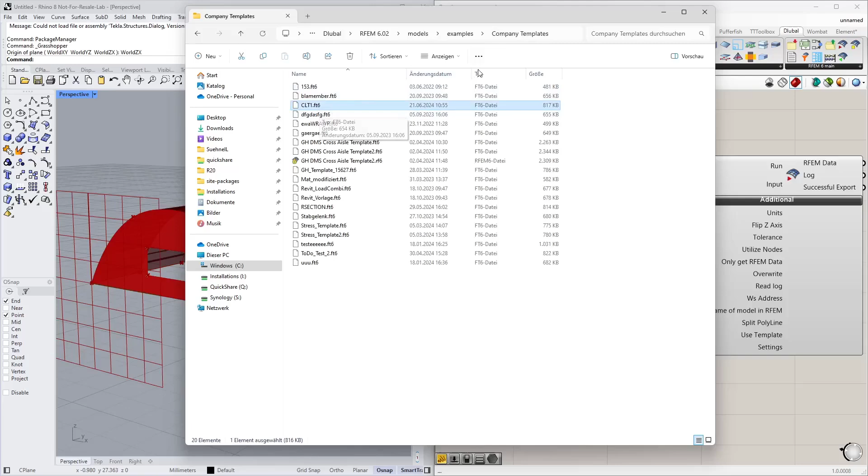So I copy the path, put it in a panel, add the CLT1 .FT6. FT6 is the ending for templates of RFEM 6, and I link it to my template input. And now when I run the export, it will read first the information from the template and then the information that I defined in my components.

And since it reads the information from the template first, and I defined already a timber class in that template and a configuration for the timber design, I can simply use the index number of that type and assign it to my surface, to my member, whatsoever. So I don't have to define it in Grasshopper, but I can use it from the template. So far so good.

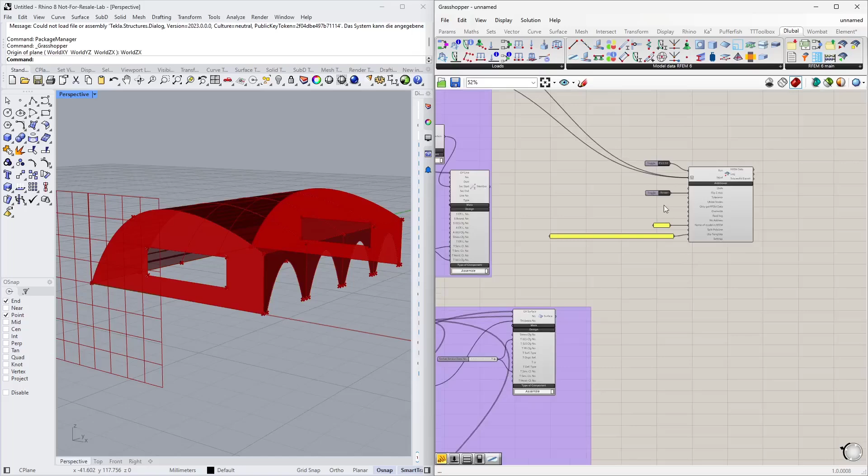Let me show the final algorithm. We did all that here, and a part of the last group. These two definitions are missing due to the time. I think it's anyway clear how I did that. And now we can run the export. And I would like to show that at least once.

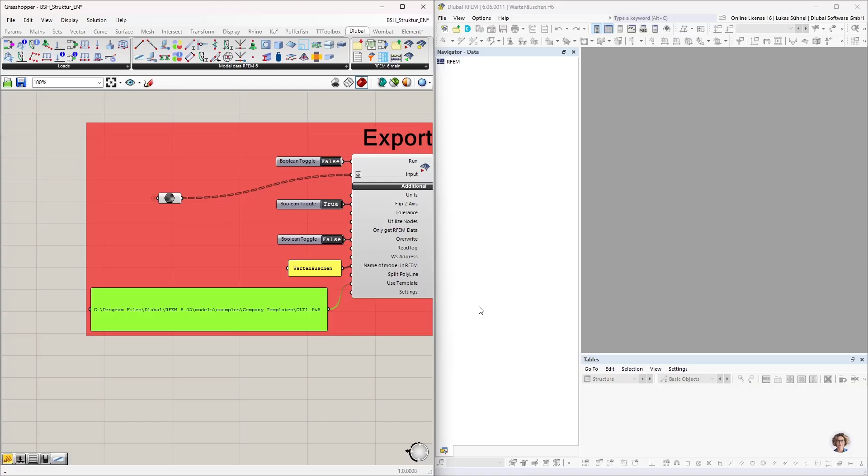So let me put it on the right hand side. I close that file. And now, that's the path to the template. And now I can change it to true, and we should get the file in RFEM. It's creating a connection with RFEM. Reading the data from the template. You can see it already here. Load cases and so on are defined. That's part of my template. And then it will create materials, sections and so on based on the Grasshopper algorithm.

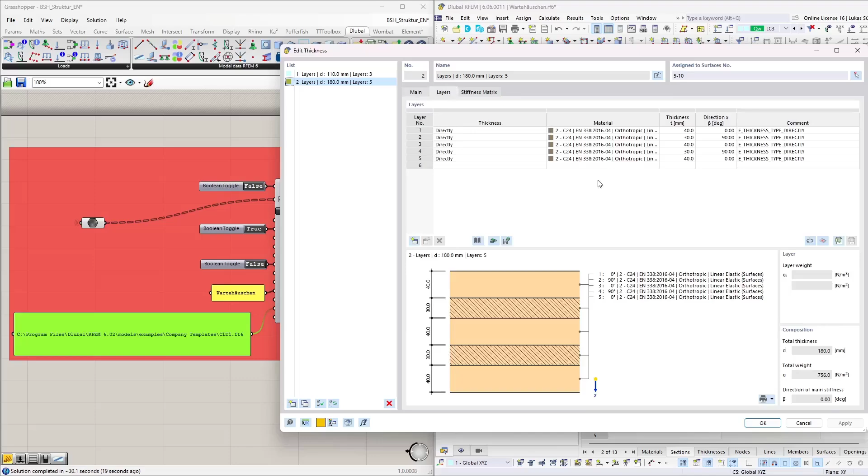All right. I disconnect the connection and I can see my file here. I have the geometry that I expected, my surfaces with the openings, my thicknesses with these layers that I defined before. And that's already a file I can calculate. Let me maximize it for a second. I can generate the mesh. In this predefined algorithm, I used a mesh refinement of 0.2 meters. That's why I have just 2 elements and not 3 over the width.

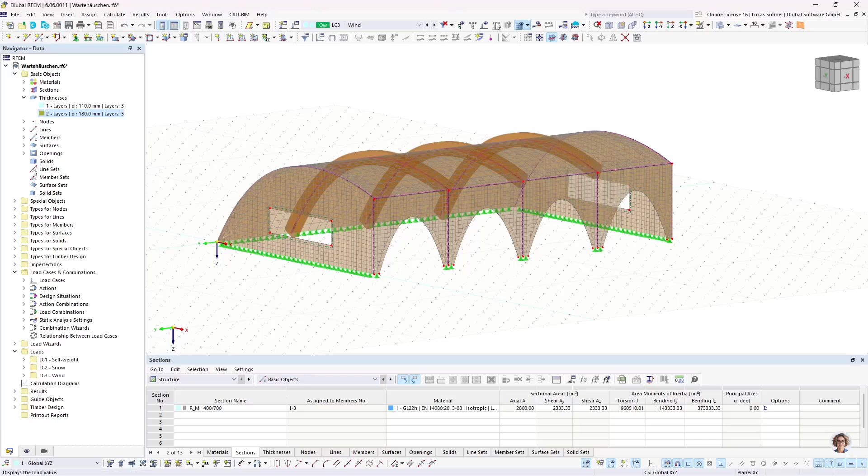But you can clearly see that the mesh refinement has been defined on these walls, except the roof where I have the global FE mesh settings. And we can also see that I have these line hinges defined, and all the things that I showed here. And if everything is fine, we can also run a calculation and get the results. And this step, running the calculation, can also be triggered via the Grasshopper component. So that's also possible.

All right. That should be it from my side. I hope I was able to show you some new stuff, some helpful workflows, maybe regarding the numbering and the line hinges.